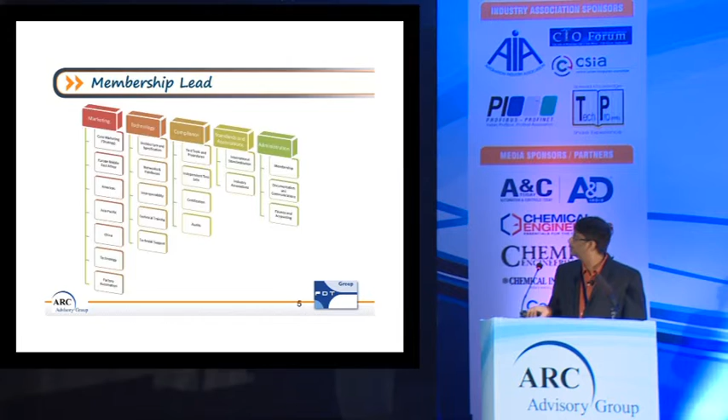So there are about 90 companies. I would say most of the companies here also are a part of the FDT, I would think so.

Now coming to the India objectives of FDT, when we started about 2 years back, its main objective was to bring in awareness of this technology in India, mainly with the end users, and support the market needs here. Of course, the members are the main marketing platform for the events that we do. We're also building community from the developer side, supporting training and workshops on the FDT, and sharing best practices with all the members. There is also local certification capability, and we already have a test center here. Utthunga is one of the test centers for FDT certification, accredited by the FDT Group. And of course, the main thing is how we bring in local membership here and build a consortium within the community. That's the thing.

So today from the India members we have about 6 or 7 members, which are some service providers, then there are some control system manufacturers and device manufacturers within this group today. So what we are looking at is participation from the end users, and also some of the other automation companies, so that we form a bigger consortium to support the issues that are there with the integration front. So I look forward to that part.

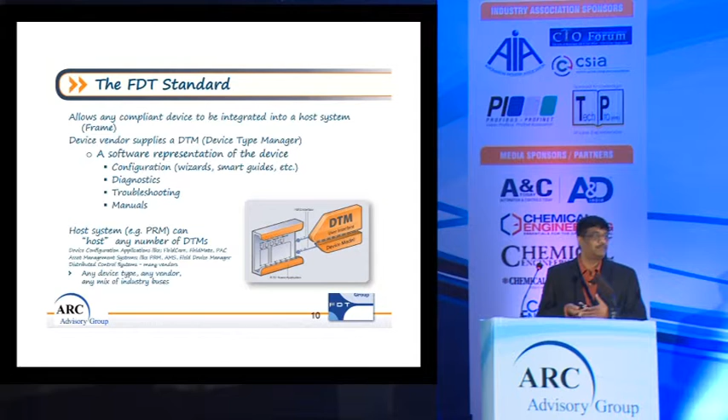The host system hosts all these DTMs and some of the applications there are configuration applications traditionally available today through FieldCare, FieldMate, and asset management systems like AMS, FDM from various companies. Irrespective of device type, vendor, or mix of industry buses, FDT supports all different protocols. That's one of the beauties of this, because one issue we talked about yesterday was interoperability and how it can be addressed at the device level. So how we bring this information into a standardized format is where FDT helps.

So what are the key features of the standard? One is it's extendable to any industry bus. It's not limited - today there are about 17 protocols supported by the FDT Group, but new things get added on. For instance, ISA 100 for annex has recently been added.

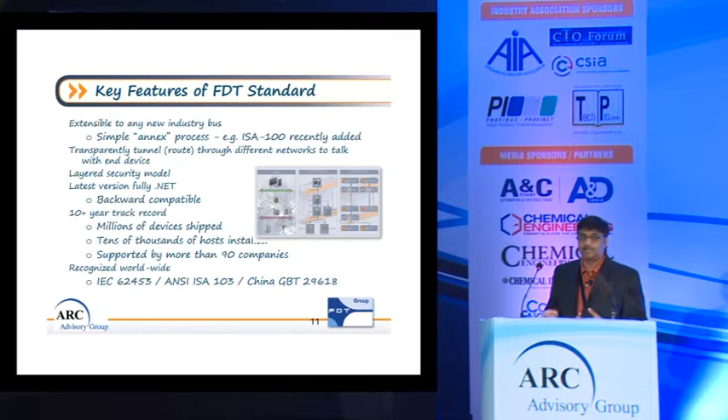Another feature is there's transparent communication that allows the application to talk to the device irrespective of protocol. And importantly, security is now a main requirement, and the FDT standard supports a layered security model based on .NET 4.0, which is the latest version, called FDT 2.0. However, it is backward compatible.

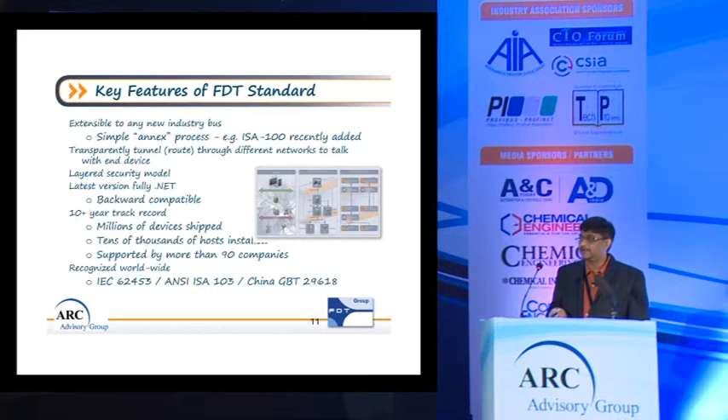In terms of track record, the FDT standard has been active for about 10 years now. There are millions of devices shipped with this FDT standard, and tens of thousands of hosts installed with FDT. It's supported by more than 90 companies. FDT is also a worldwide, international standard based on the IEC. It's also an ANSI standard from the ISA, and a China standard as well - so it's very well known internationally.

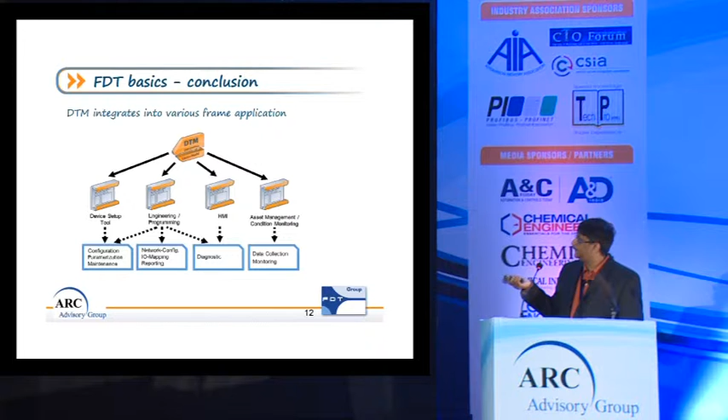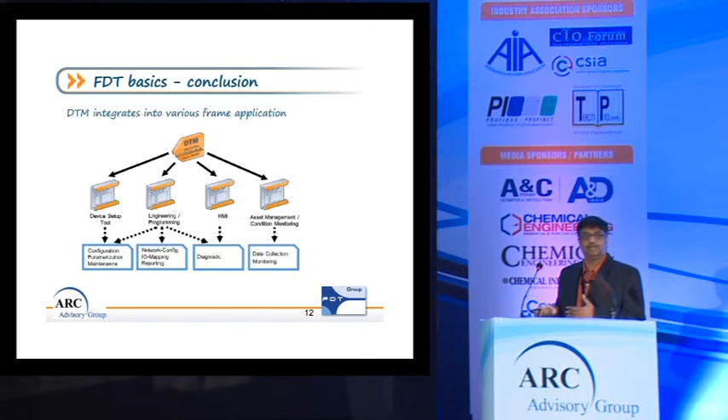In terms of how the DTM I talked about as the driver integrates into various applications - like device setup tools, engineering tools, HMIs, asset management, or condition monitoring tools - these are some examples. I'll go show some examples of how these are done.

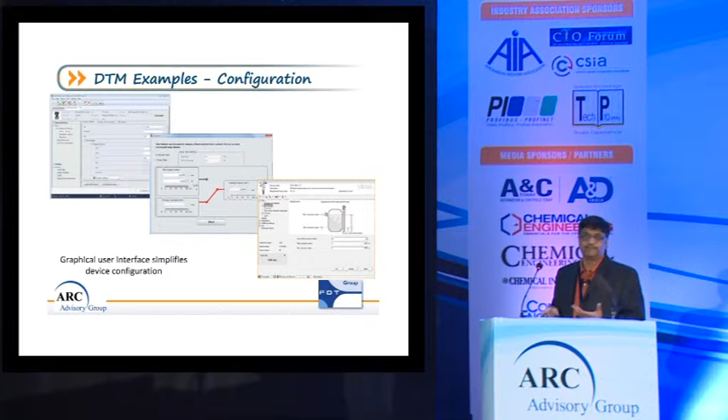There are some examples of DTMs, like the graphical user interfaces. The DTMs provide the representation of the device - it's got business logic and a user interface representing how you would configure the device. There are various graphics here, for example showing the device setup, and some screens from another customer like Vega with a level device and tank. Depending on the complexity of graphics required, you can build those graphics within the DTMs.

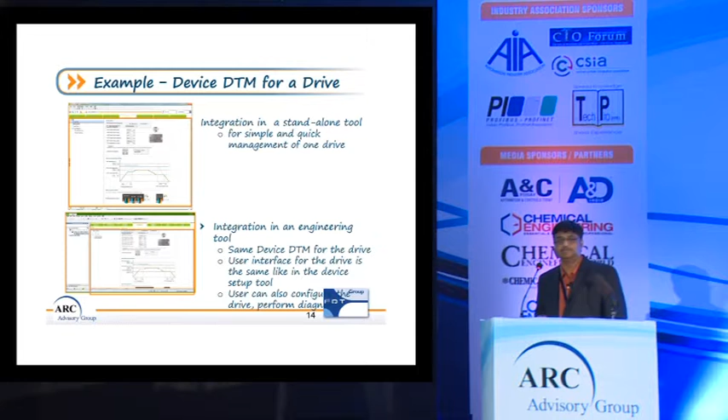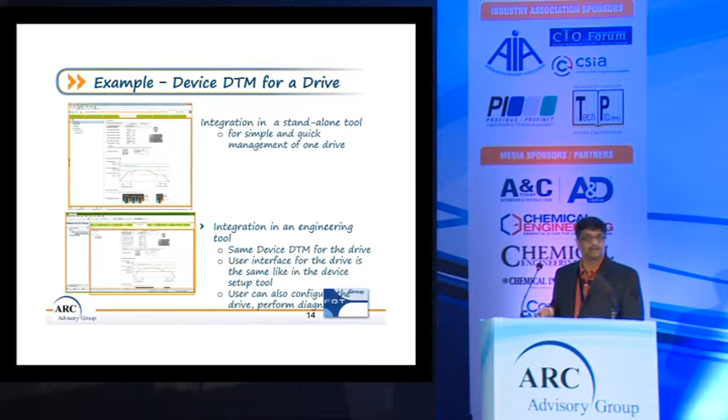There are some other examples from drives - these drives are from factory automation, so FDT also supports factory automation. DTMs can be integrated as a standalone tool, or integrated into engineering tools where you have the same look and feel of the device interface for configuration. It's a quick and easy way of doing diagnostics with these kinds of setups.

Most importantly, it's not just for configuration - there are DTMs doing network level diagnostics as well, where you could look at network issues related to, for example, a missing terminator - you'd be able to figure that out within the DTM. So DTMs are a very good diagnostic interface, and they support the various symbols from the NE 107 guidelines - that's another plus point of FDT.

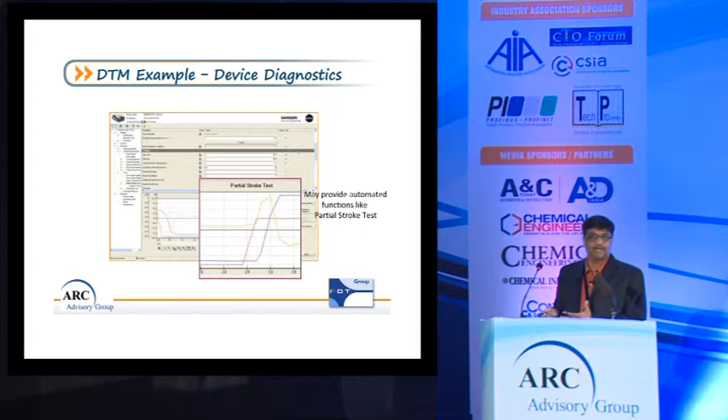There's another complex example as well - from a valve manufacturer, looking at a partial stroke test. You could build DTMs that perform the partial stroke test and do compliance testing. So you can build in different functions which range from simple to complex methods.

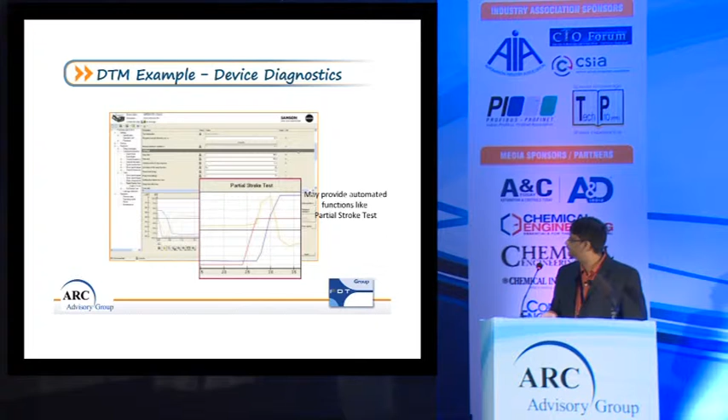So now these are the DTMs, but where are these hosted? These are hosted in an application called the FRAME application. This FRAME application represents a project tree where you would see the configuration of the DTMs on one side, and the physical architecture of the plant layout on the other. Using this frame application, you will be able to have a single window to manage your devices.

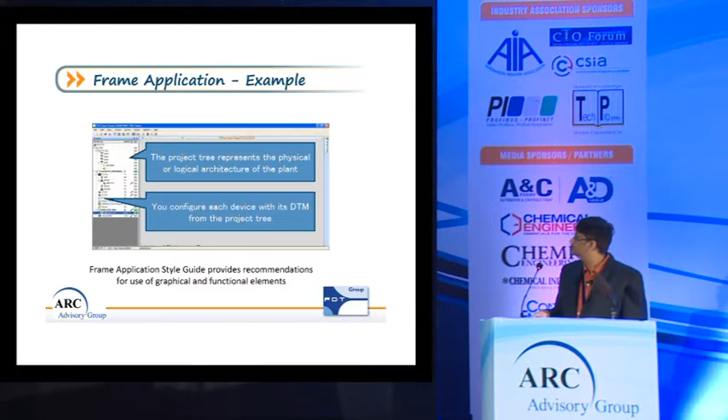So overall, I would say it's the versatile communication that is brought up here, which could be from a point-to-point, or it could be from a mobile interface, or a network or centralized communications.

This technology can be used at various life cycle phases, right from commissioning, where you would use it for doing the commissioning and configuration of these devices, right up to the maintenance and diagnostics. So it supports the complete life cycle.

The main thing is this supports transparent routing across different networks. So all the networks are supported, remote diagnostics can be supported on this, and smart information access is made available through gateways or remote IOs and other devices.

So the open-ended integration - like I said, about 17 protocols today are supported, with both process and factory supported protocols. And any other protocols get added because that's the job of the FDT Group, to add more protocols depending on the industry needs.

From an intelligence perspective, there's already intelligence available, and now to integrate these intelligence is, I would say, not a matter of if, but a matter of when. So that's important for how we take this information out.

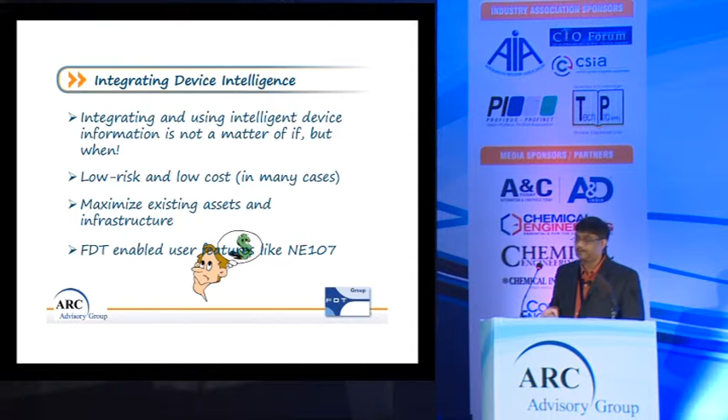And of course, you will be able to maximize the existing assets. That's the first part, more important for what we're here to look at. And more importantly, FDT enables user features, which is also important from a diagnostic perspective, because maintenance technicians would be able to really visualize what the problems are with respect to what is happening.

So these were some of the topics from an overview of the FDT standard. Now I'll look at how an end user, for example, has benefited or had success with using FDT.

So I have an example with a company called MOL, the MOL Group, which is based in Hungary. This is some of the information that I got from the FDT Group, who compiled this information. The problem they had was to improve plant reliability, which is one of the main problems, of course.

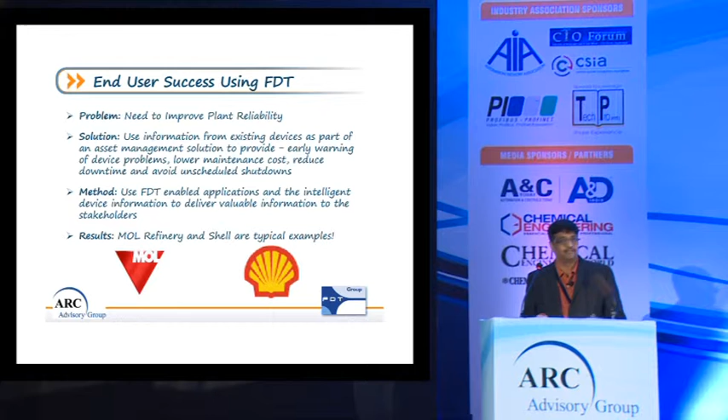And the solution was they wanted to use the existing devices to provide early warning of impending problems, and also to reduce downtime and reduce unscheduled shutdowns. So this is the main problem that was outlined for this particular end user.

And the method they used was FDT-enabled applications. As I said, FDT is a standard, but it's not a product - it's a kind of enabler, so it is found in applications.

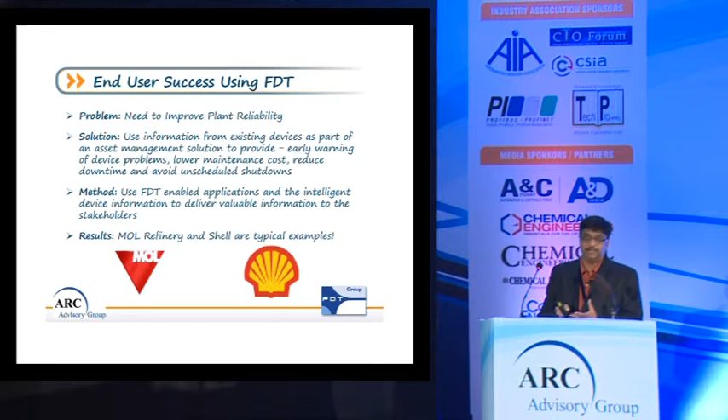So FDT-enabled applications are used, and the intelligent device information that comes from the devices is seen using the DTMs. They are used to deliver valuable information to the stakeholders. That was the method that was used.

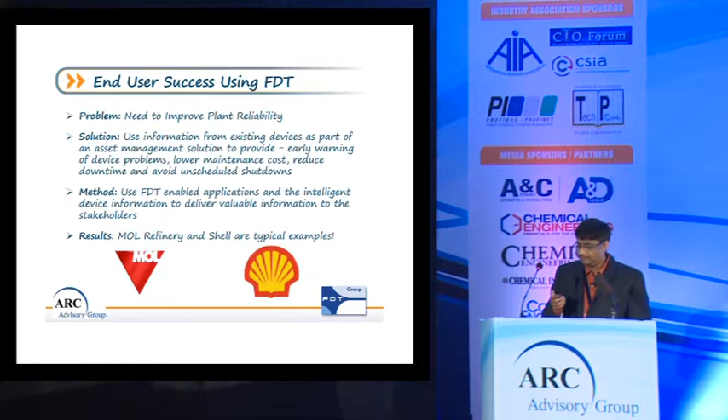So I have one example, only from MOL. I don't have the Shell example - I did have it, but I don't have time to talk about that case.

So MOL is a Danube Refinery, which is in Hungary, in Budapest. This was about 30,000 intelligent devices there, and it had control systems from Emerson, Honeywell, and Yokogawa. And there are devices, of course, from Emerson, Endress+Hauser, and Yokogawa, and valves - Fisher, Flowserve, and Samson.

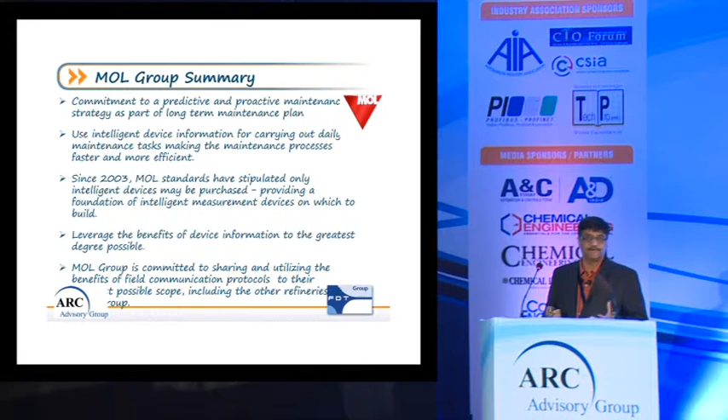There was an interesting thing about a commitment from this MOL group, so I wanted to bring it up. Their commitment was to predictive and proactive maintenance strategy as part of a long-term maintenance plan, using device information for carrying out maintenance tasks from an efficiency perspective. They also stipulated since 2003 that only intelligent devices need to be purchased. So that was one underlying thing. They wanted to leverage the benefits of device information, and most importantly, they committed to using information from the field bus protocol. That's another important commitment the MOL group made.

The main thing they came out with was moving this predictive or intelligent device intelligence from reactive towards proactive. What benefit did they get out of this? The main problem MOL had was with their valves. Without diagnostic information, they were replacing all the valves irrespective of whether the problem was actually there. So they decided to go in for an online mechanism of diagnostics. Most of the valves were HART-based, and the communication was on HART, with information taken into a central maintenance system where they got information about impending failures.

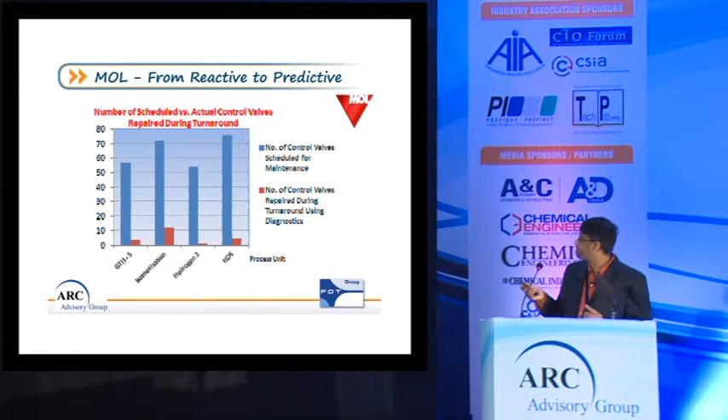The bottom line benefit MOL achieved using all this at different stages: in case one, maintenance cost was pretty high without diagnostics. With HART diagnostics, the online diagnostics, they were able to achieve very low turnaround, and the cost of maintenance was reduced drastically.

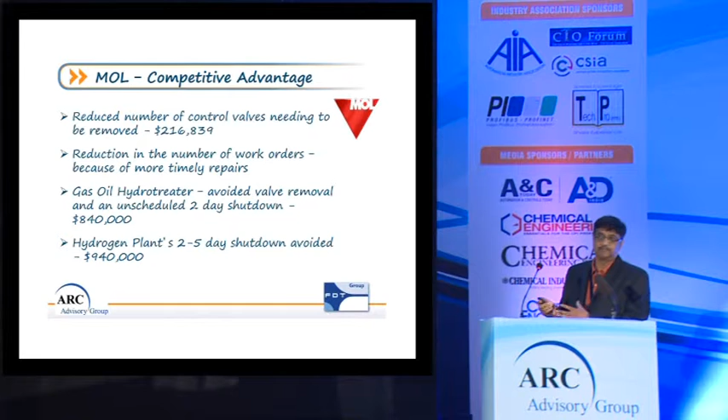I'll share some figures on the cost benefit they achieved. They achieved a reduced number of control valves needing to be removed, since they didn't have to remove all the valves, saving around $216,000. There was also reduction in the number of work orders because of timely repairs, since they had informed information. At another station they avoided valve removal, saving $840,000. And the hydrogen plant, which was a 2 to 5 day shutdown, saved another $940,000. Overall, counting all this, there is a significant cost benefit that this MOL group achieved.

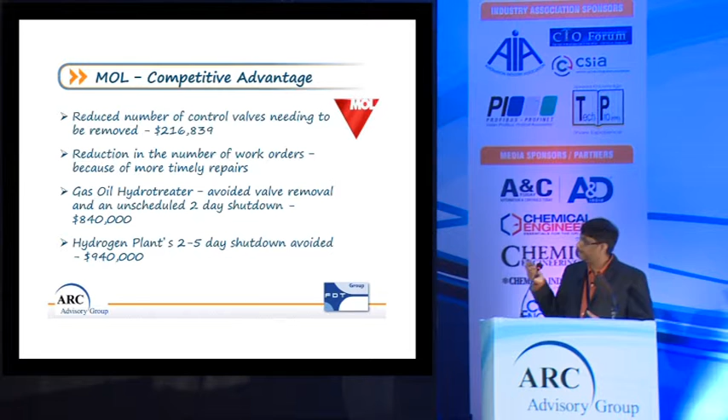This is one example from the FDT Group. I don't have the Shell data - I do have it, but I cannot share it here. We are also trying to work with Reliance Refinery to get similar data on the benefits they have achieved, because Reliance Refinery is using a lot of FDT technology in their applications.

Going further, the competitive advantage brought using this device diagnostics or device intelligence is basically about changing the culture. Since yesterday we've been talking about how the change of culture is required in terms of the benefit from a risk-based approach. With these kinds of standards there is low risk involved because it's a proven standard. You can use device intelligence integration for the benefit of achieving competitiveness like what MOL has achieved, and participating in the Industrial Internet of Things. Finally, FDT technology is very much there to support this digital transformation.

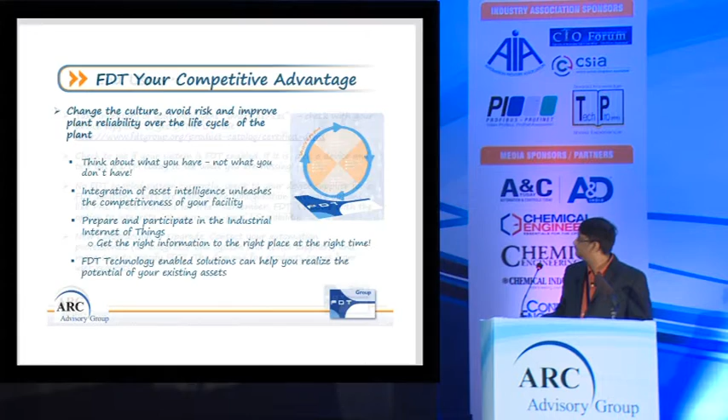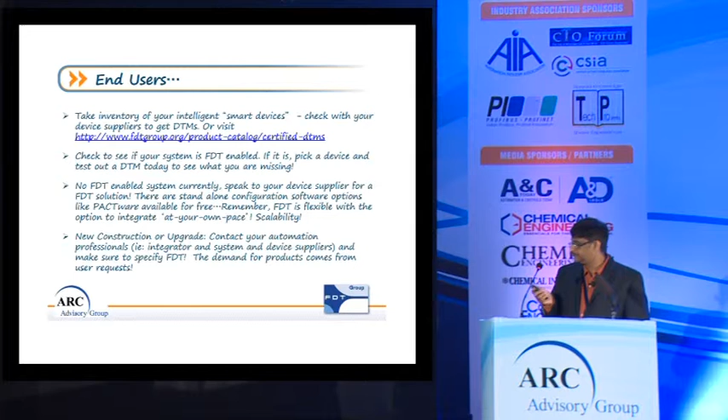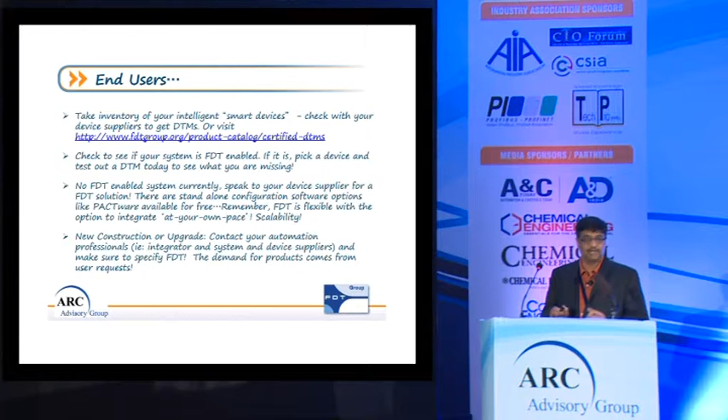Also check if the system or application that you have is FDT enabled. If not, you'll be able to speak to any of the suppliers to get the application FDT enabled, or if you're looking at a new construction or upgrade. There are automation professionals here, and the member companies that are here today are ready to help in this part. But the main thing is you need to make sure you specify FDT, and we look at the demand for the products coming from the end user. So we look at the end user driving more in this part.

And from a supplier's perspective, who is looking at how to develop DTMs and how to develop the interfaces or to do the customization of this, you can easily get to india@fdtgroup.com. That's our email, so we will be able to help on that.

So that is all about from the FDT side. You got some picture about how the standard is gaining benefit from the device intelligence and the competitive advantage. Now I'll go towards how FDT is getting married to OPC UA.

Most of you already know about OPC UA as a data interchange open interface standard for exchanging data from your control system right up to the enterprise. Today OPC UA is one of the standards that supports various information models, and there are a lot of collaborative models out there. FDT is one of the collaborative standards that is going to get mapped into the OPC UA information model.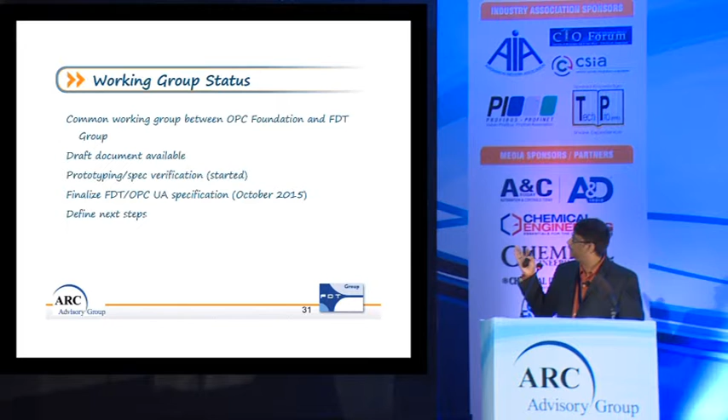So basically that's where I'd like to talk about some work that is happening with the group. There is a working group between OPC and FDT, and the standard is being worked out. There's a prototyping activity that has started for coming out with an OPC UA-based FDT server. This specification for mapping the FDT device model to the OPC UA model is in progress. I think the specification is due by October 2015.

And there are next steps, of course. I will also share about the next step, beyond how it's happening.

Some of the use cases the project is looking at include targeting asset management from a device perspective, device asset management, diagnostics of the devices, predictive maintenance, and mobile access. Mobile access is another use case that is being worked out with this prototype.

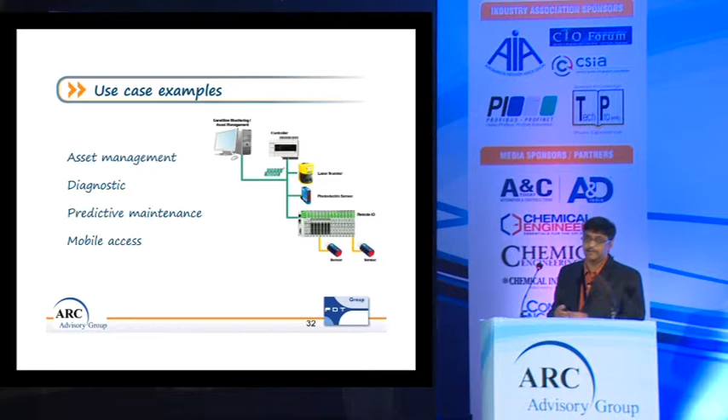So this standard from FDT to an OPC UA standard definition is where, as I said, the project being worked on is implementing an OPC UA server based on the FDT2 specification. There will be a standard FDT2 OPC UA Information Model, which is an extension of the OPC UA device integration, called the OPC UA DI layer. Then there are mapping functions from the DTMs to this particular layer. That is the specification which is being worked out.

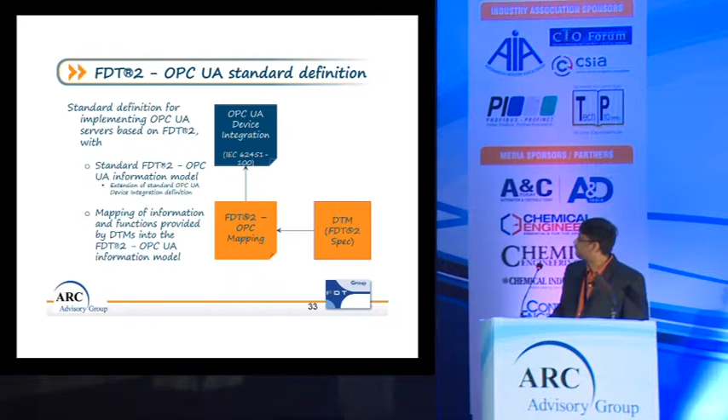So what is involved in this activity is, number one, the creation of the FDT2 and OPC UA information model. What are the stages involved? First, you have a topology of the network, with all your devices on this network, and you use an engineering tool to do all the configuration of this network, which will be used to generate an FDT2 OPC UA information model.

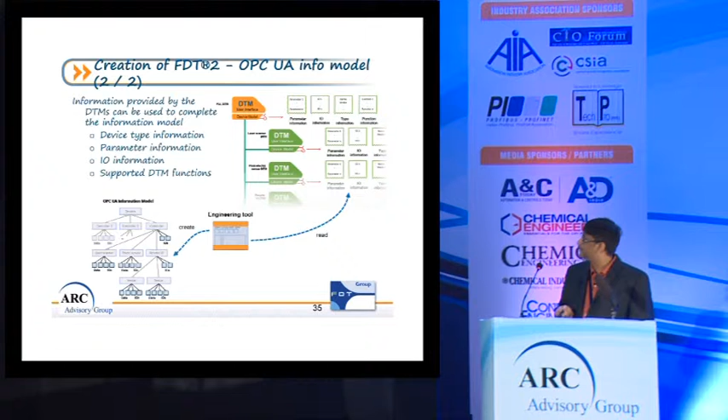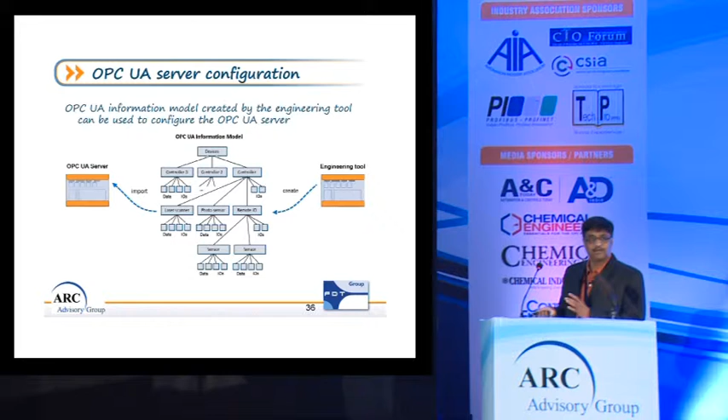In the OPC UA information model, you also bring in information from the DTMs that are added to it, for example device type information, what type of parameters you want to bring in, what type of IO information, and what supporting functions are there with the DTMs. Then you create an OPC UA server configuration based on what you've created with the engineering tool on the information model. So these are the steps where you end up with an OPC UA server available to you.

So what happens today with all this, in case you've quickly understood it: I told about a frame, I told about a DTM. Now the OPC UA server becomes a frame application here. The frame, which was a particular application running separately on the control system, now becomes part of the OPC server itself. The object, which was the frame object, is now integrated inside the OPC server along with the DTMs.

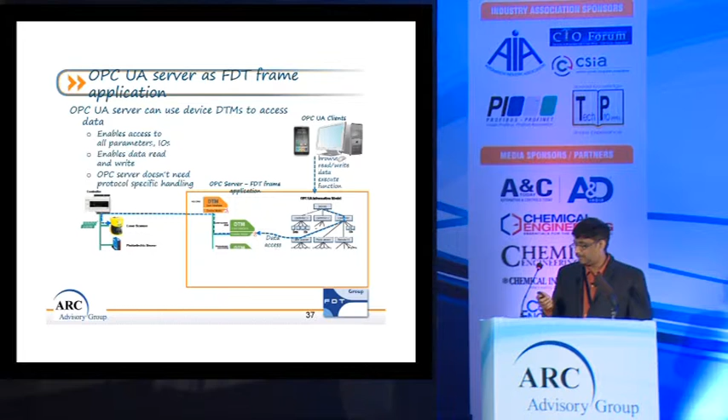So then you will have an OPC UA client being developed, and the OPC UA client will do the access. What is being planned today is very minimal access in terms of parameters, IOs, and also doing some data read and write, and of course the execution of these functions. The graphics part still needs to be worked out within the OPC UA DI client.

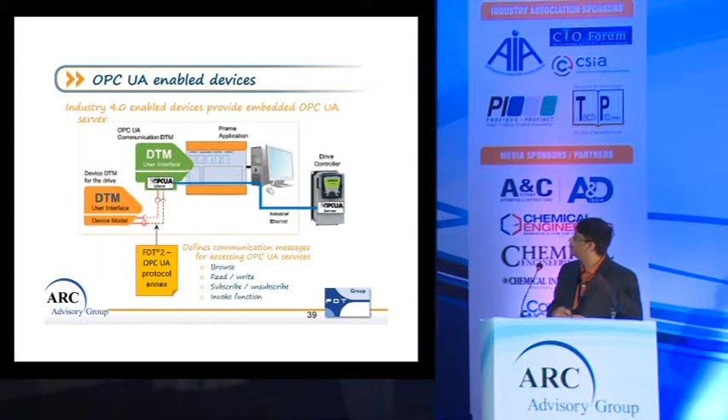Going further, there's another thought in terms of OPC UA enabled devices. Most manufacturers today have an OPC UA server already embedded on the device itself. If you have an OPC UA server embedded on the device, we will have the application related things having the DTM having an OPC UA client. So it's another version of things.

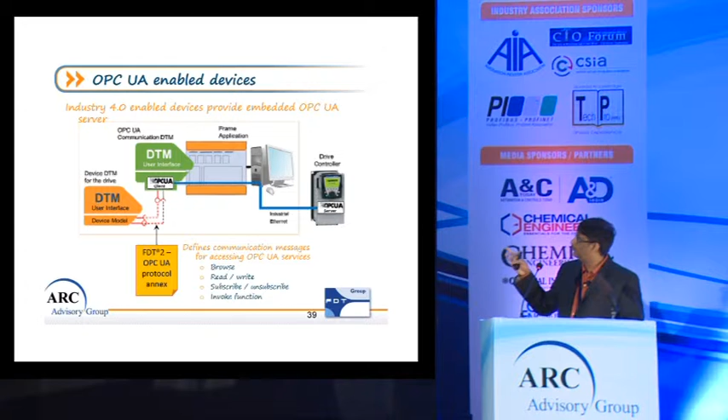You'll have an OPC client, which is a COM DTM, and the device DTM mapping through this standard which is coming up.

So what are the components of the future coming up beyond this, the OPC UA servers with FDT2? And beyond that, like yesterday we heard about integrated engineering where they're looking at the consistency of various workflow data packages. AutomationML is one of the standards, which most of you would be aware brings data consistency across different engineering tool chains.

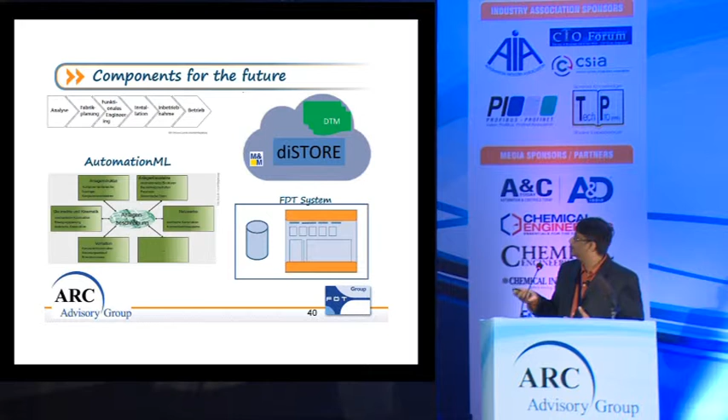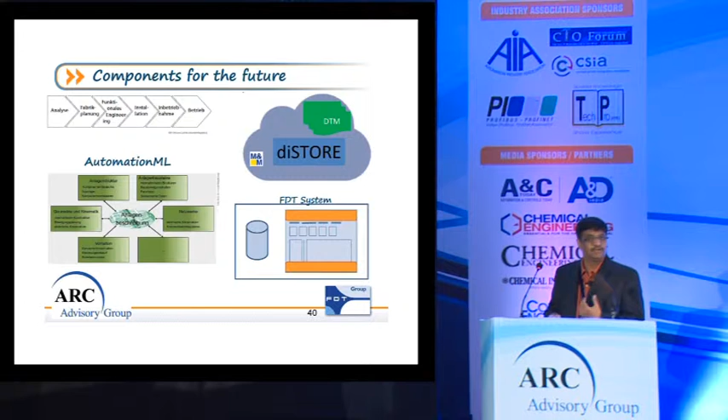FDT is going to support this AutomationML for network topology definition. And then there is also the DTM, which is now coming into the cloud. You'll have cloud-based DTMs hosted on the cloud, and one of the companies is trying to work on this and demonstrate it.

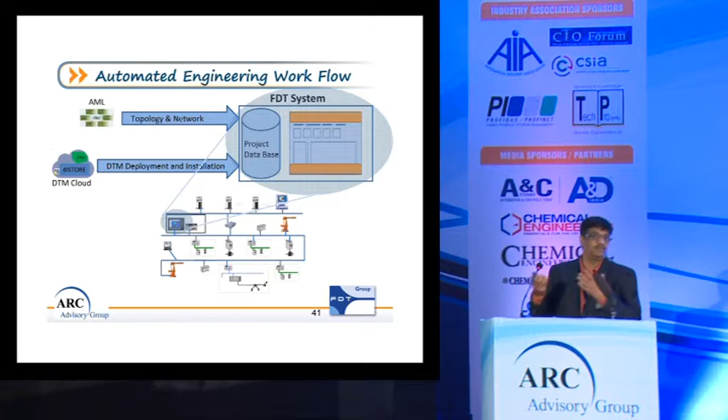In essence, how this would look together is you will have an FDT system in your network hierarchy, which will have the topology and network definition through AutomationML. And then the DTM cloud will do the DTM deployment and installation over the cloud. Today, all the DTMs are hosted on different servers. In the future, you could do it remotely, put it on a cloud, and be able to do a lot of instantiation with this. Through the Internet of Things, you will have ways of communicating across geographies with these DTMs.

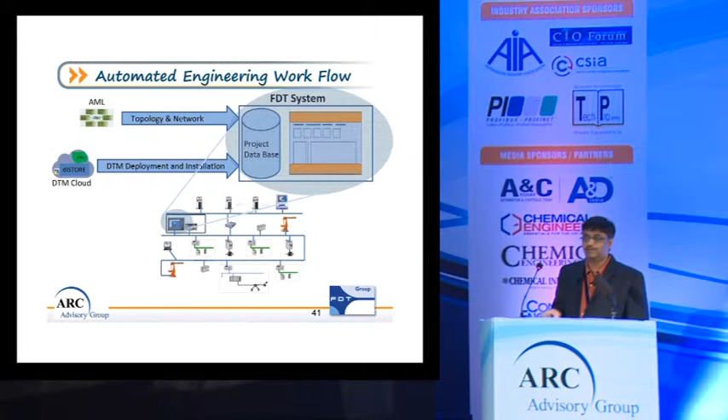So this is how it looks, it's called automated engineering workflow, and this is how the current system will finally look. This is the next stage where the group is trying to work, and some activities where I see some projects going on with it.

And the concept now is unification of system engineering through AutomationML, and that is where Industry 4.0 will be supported. FDT also says it's not 4.0 alone, but it's backward compatible for 3.0 as well. Required extensions are coming up for the OPC UA protocol annex and the AutomationML annex as well. So this is in conclusion about what is happening from the standards perspective.